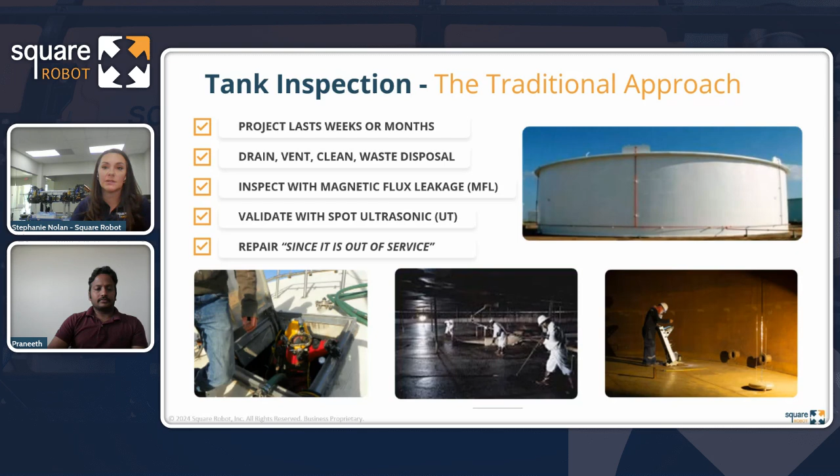And then often, because you're taking it out of service anyway, you're just going to do repairs whether or not they're needed. So they might not be needed. Maybe it's something that could have waited 5 to 10 years, but it's already out of service. So you think you're just adding time, money, resources to these out of service inspections.

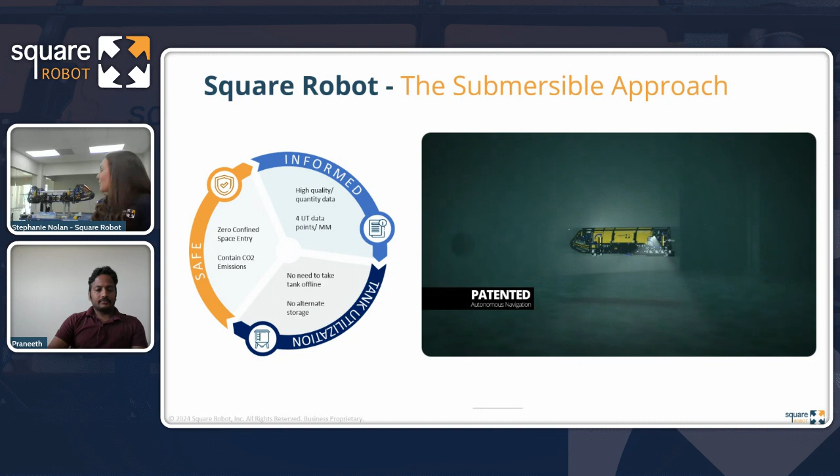So what Square Robot does instead, the submersible approach. This video right here, it's our robot, like the one that we have behind me. And what we use this for is obviously your tank inspections. We'll get into some of the technical aspects in just a bit, but there are a few things I want to point out. One, we do the inspection with the tank full of product.

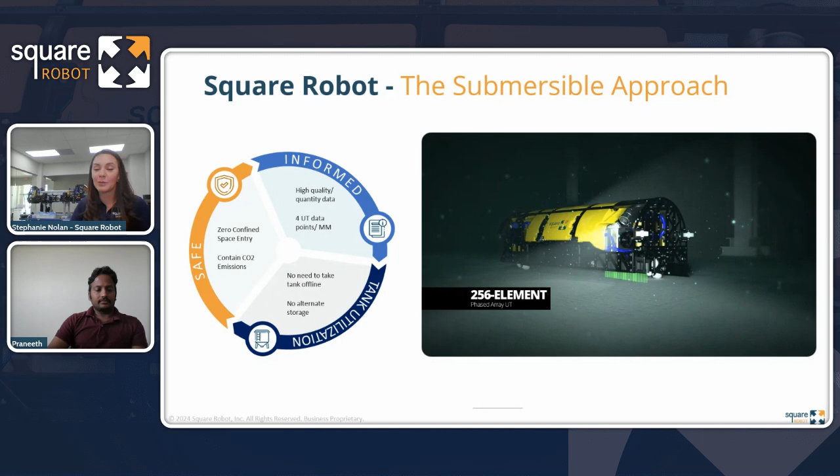We ask for a minimum of 15 feet, but I say the more, the better. So don't ever drain it down to 15. If your tank is full, keep it full. But we want to take that robotic inspection and replace the out of service.

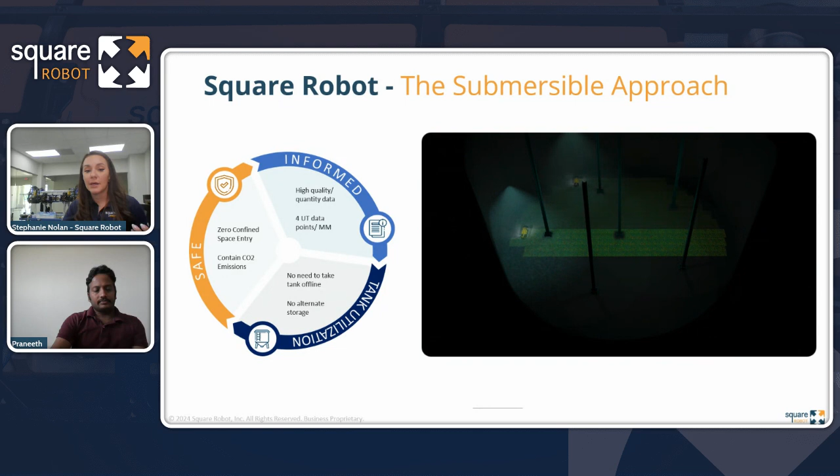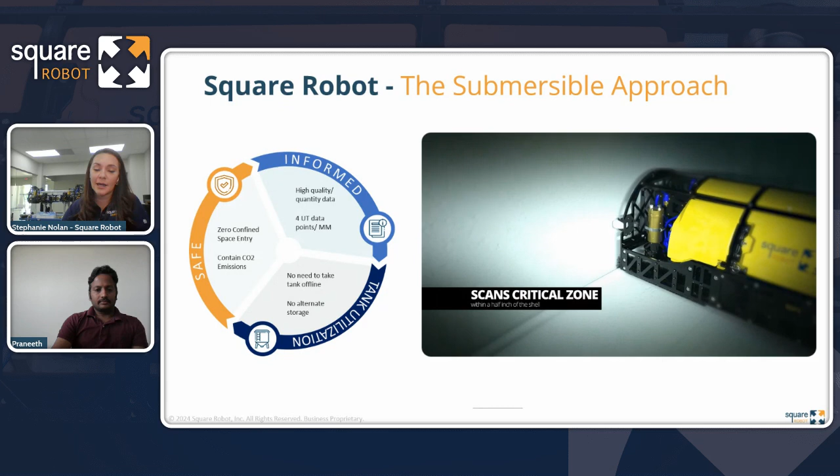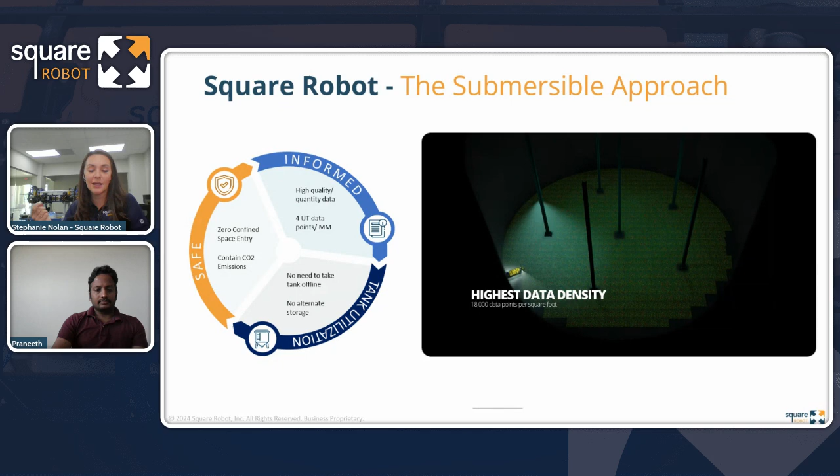So in terms of data, we're giving by far higher quality and quantity data than any other robotic service that's on the market. So if you think old school crawlers, and higher quality and quantity compared to your out of service traditional. You're getting about 4 UT data points per millimeter. So if we're thinking like a 100-foot diesel tank, that's 400 million UT data points that we're pulling. So that confidence level, your understanding of your tank asset, its integrity, is at the top.

On top of it, if we think of that same 100-foot diesel tank, we're containing around 5 tons of emissions, CO2 equivalent emissions, and about 500 confined space entry hours. All of that leads to the ROI for your plant. So you don't have to take the tank offline. You don't have to drain it out. No alternative storage needs to be brought in, and you're not spending hundreds, sometimes thousands of project management hours just working on this out of service inspection.

Let's keep going. How do we do this? I'd say we have a pretty simple approach. We are very self-contained, which is nice. Usually I go out, if it's a new client, for that first day, and the first day is always a spectacle. Everyone wants to know what's going on. They want to see how it works. But after that, they realize it's pretty simple.

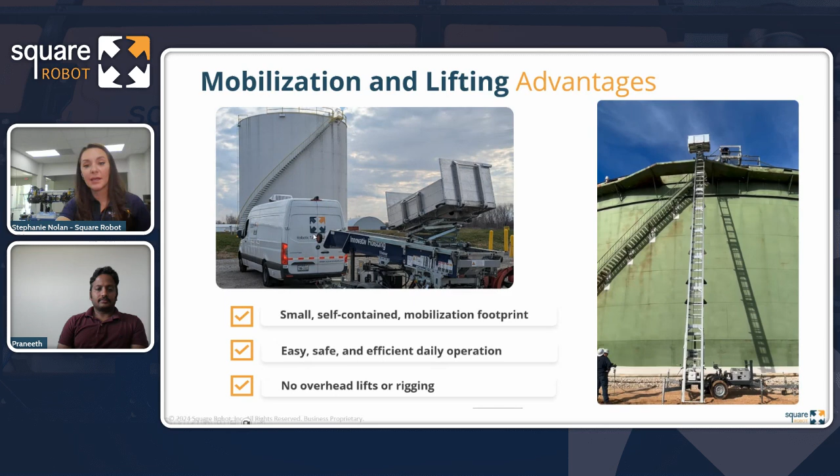We send out a 3-man crew. You can see the van, the robot's in the van right here. And we really just want to be as safe and efficient as possible in your daily operation. So hopefully we get on site, and you can worry about everything else that you have already going on. And we're just off to the side inspecting your tank and wrapping it up. We want to be the easy button for you.

Okay, on to our technology. So what we provide as a whole is compliance. I know the API 653 I mentioned is regulated. It's something that you have to do in NFPA fire water tanks, but even your process water tanks, depending on your internal company policy, regardless of what it is, we don't want any cracking. We don't want any corrosion in your tanks. You don't want to have to worry about a loss of water for your plant operations.

So what we're providing with our robot is tank bottom thickness using our phased array UT. You can see the PAUT, that's what we call it. It's 256 elements. And I want to pause because I want us to think back to that out of service inspection where an out of service inspection would use a single element UT to prove up any suspected corrosion points. Let's take that single element, multiply it. We have 256. So high quantity, high quality data.

With that, we're able to delineate between product and soil side corrosion. So where maybe the diesel is actually sitting, if there's corrosion on this side, all the way down to where your tank is on the bottom, maybe a cement foundation or the earth. We can tell the difference where that corrosion is. On top of that, if you're worried about coating, any coating failures, bubbling, blistering, we can measure through that. We've also done a fiberglass lined tank actually for one of our power plants before. So if you have any concerns about that, it's something that we can handle.

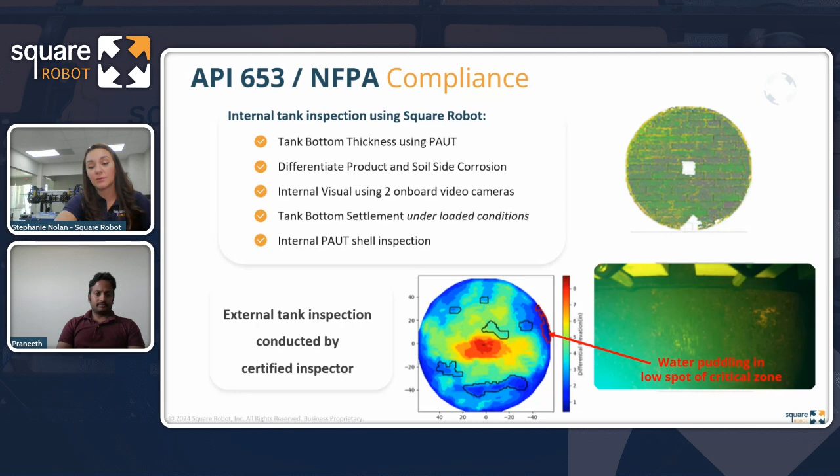So again, understanding your tank asset as a whole, understanding the root cause as opposed to just pulling it out of service every 10 years without knowledge of potentially what you did last time. And all of our crews go out with 3 people. So you will have an API 653 inspector like Praneeth here, who's there not only for the internals, but to conduct any external UT readings needed for API 653 compliance.

All right, into a little bit more of our tech, and then we'll jump into case studies. So that phased array UT, 12-inch rigid plane, you can see it right here. We're pulling A, B, and C scans. So that full approach, and what we do with this, we optimize the robot to get that most important part of your tank. You can see it right here. I'm going to play this again. It is pushing right up against the tank shell. See that? Within ½ an inch.

And we're optimizing it to look at your critical zone. So that's where the shell meets the bottom, the most susceptible area for corrosion. That's that first optimization. When we look at your tank inspection, that's what we focus on. After that, we'll hit the rest of the internals, accessible coverage. And then you can see right here, this soil side corrosion. We'll go ahead, show any indications in your report, measure the wall loss, note if it's above your API threshold.

And like I mentioned with our settlement report, if you do have concerns with water puddling, this one's interesting because you can really see it pretty clearly, a fuel oil tank, but look at all that water puddling that's sitting right underneath the PAUT.

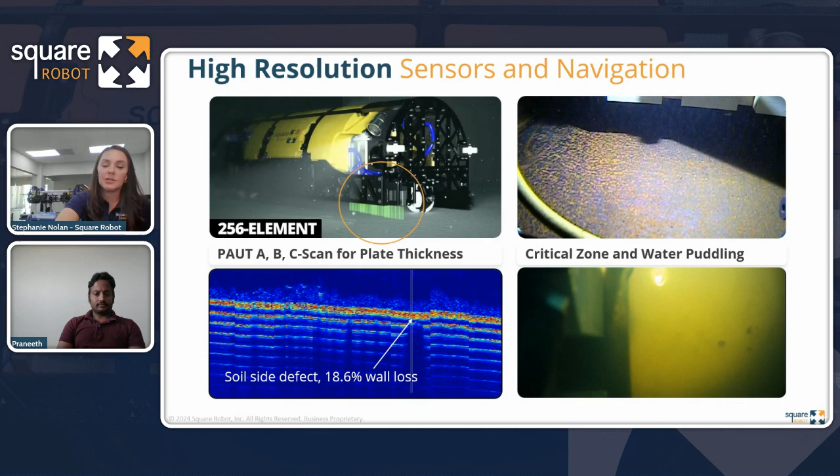Just giving you, again, full confidence, high confidence of what your tank looks like. Now we'll hit a few case studies. I love these because it really shows you the impact, the investment, and then we'll open it up for any questions. But again, thanks for joining me today.

Okay, this first one is great. I was on almost all of these inspections, which is always fun. I love to meet people in person, especially after sometimes you've been talking for weeks or months. It's great to put a face to a name.

But this was a unique one in that they wanted to knock out all of their tanks at once. Makes total sense to me, but a lot of times these tank inspections are staggered. You can line them up all on one inspection interval. You hit it in one pass, and with that comes decreased costs for mobilization and discount for your inspection as a whole. So with this customer, they had 2 fuel oil tanks.

You can see them on the left of the picture. They were, I believe, about 60 foot, needed API 653 inspections. But they said, while you're out here, we also need our water tanks done. So they have the 2 on the right. I believe it was a 34 and another 59-foot water tank. We knocked all 4 tanks out in 3 days, nice and quick.

The first day was exactly what I said. I went out there, we got to walk down the robot, show all the components. They actually brought in nearby plant managers because you want to see the process. At the very end, a happy client, happy plant manager. We eliminated over 1,000 hours of confined space entry, contained 4 tons of emissions, saved them hundreds of thousands of dollars, which is a number I always love to hear. And they were actually jet fuel. The 2 jet fuel tanks got a 20-year inspection interval, so in great condition.

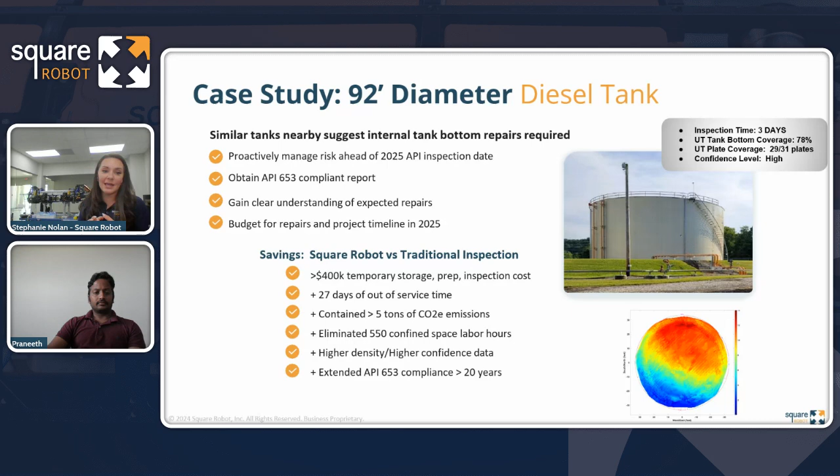And they were pleased to know their tank was in phenomenal condition. There were only 7 indications, and only one of those was above 25%. None of the 7 were above their API 653 threshold, which was great to hear for them. Their API interval, 20 plus years. They contained emissions. They kept people out of confined spaces. Everything that we want to do as a tool in your toolbox. There we go.

And our last case study that I'm going to wrap up on here is the one that we did last year. It's actually published. You can find it online. Thank you, TVA and EPRI, the Electric Power Research Institute. They had a technology cohort program that we applied to and got selected to showcase new technology to the power industry.

Now, we're not necessarily new. We've been in operation for 5 years now, but we were new at the time, newish to the power industry. We had focused previously midstream, downstream, tank terminals, refineries, those type of things. And we had only done a handful of inspections at power plants. So EPRI allowed us to join this program, which was great.

We got paired up with Tennessee Valley Authority, worked with some awesome people there. And what we did in this particular case study, which we have another one as well that you can find online, but for this one, we inspected 3 of their fuel oil tanks in 3.5 days. Now, this inspection was really comparing the ROI and the past inspection, which was out of service.

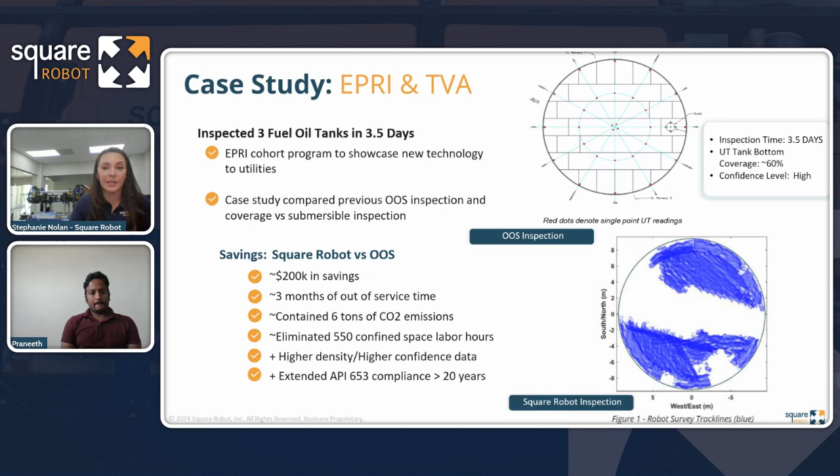The amount of bottom that we can actually inspect. So we say we want to hit 100% of accessible tank bottom. I see you, Kyle. I'll answer it in just a second. So when we say accessible, we stay away from columns, sumps, nozzles, anything like that. And if you're really concerned, we've been in tanks that have had 49 columns, massive tanks at refineries, gotten that inspection completed. And if that is a concern, we can always take a look at your tank drawings ahead of time, give you an estimate of what we think we're going to get.

But then you think back to the TVA inspection where it was out of service, and they got 28 to 40 data points. We're getting hundreds of millions of UT data points. So where we are getting that coverage, it's high quantity for sure, which is part of the reason we process our data in-house. And we have our own software. The robot is built and manufactured here by Square Robot, software built from the ground up.